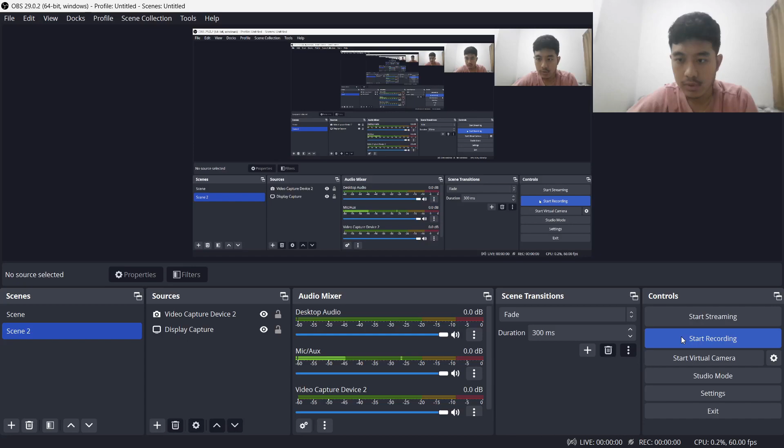Question number 2. So this video will be a series video. There will be 5 videos in total because there are 5 questions. So in this video, I will discuss and explain question number 2.

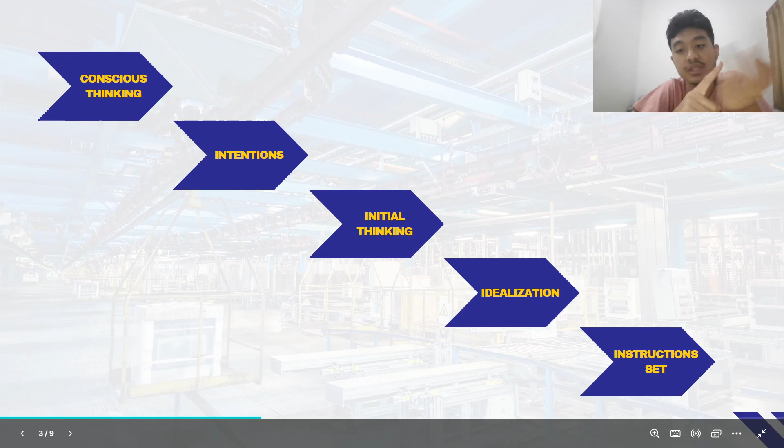Okay, so to solve the problem, we use the DAI5 framework. So we use conscious thinking, and we also use DAI5: intentions, initial thinking, idealizations, and also instruction set. So we will use this framework to solve our problems. So, intentions. So, what is the challenge first?

This challenge is: spray heads in an agricultural spraying system are to be supplied with water through 500 feet of drawn aluminum tubing from an engine-driven pump. In its most efficient operating range, the pump's output is 1500 GPM at a discharge pressure not exceeding 65 psi. For satisfactory operation, the sprinklers must operate at 30 psi or higher pressure. Minor losses and elevation changes may be neglected.

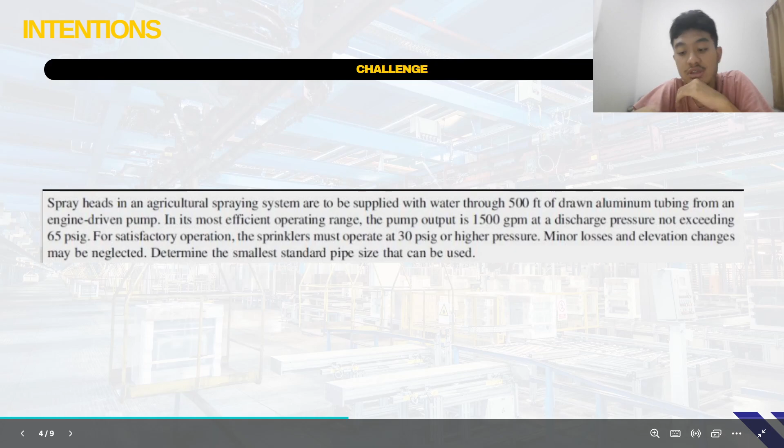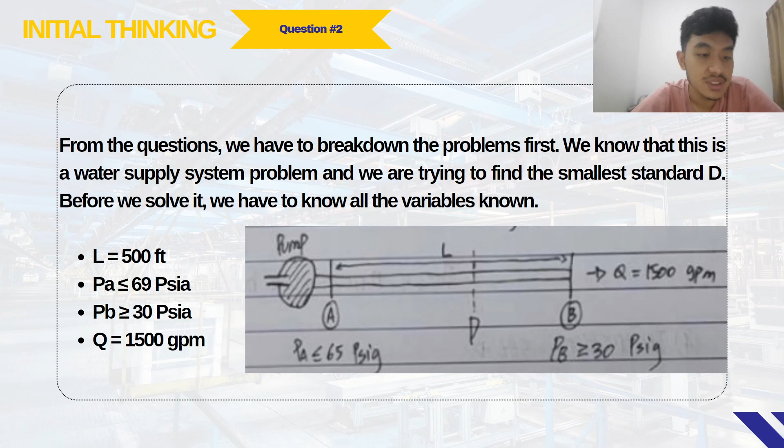We know that the length is 500 feet. The pressure A is to be less than or equal to 65, and the pressure B is greater than or equal to 30. And also the Q is 1500 GPM. So we have a few idealizations. This question is not as complicated as question number 1. It's quite a simple question. So we use a pressure equation, it's a simple pressure equation.

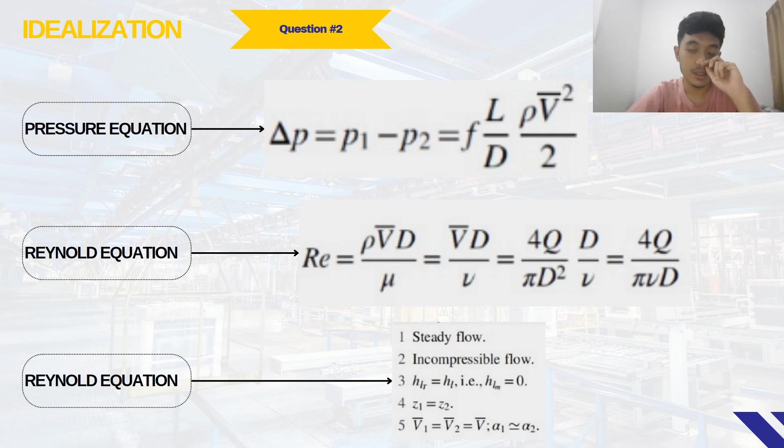So delta pressure is equal to pressure 1 minus pressure 2, is equal to f L divided by D, times rho times velocity squared divided by 2. Also, there's a Reynolds equation. We also used the Reynolds equation in question number 1, so the formula is quite the same.

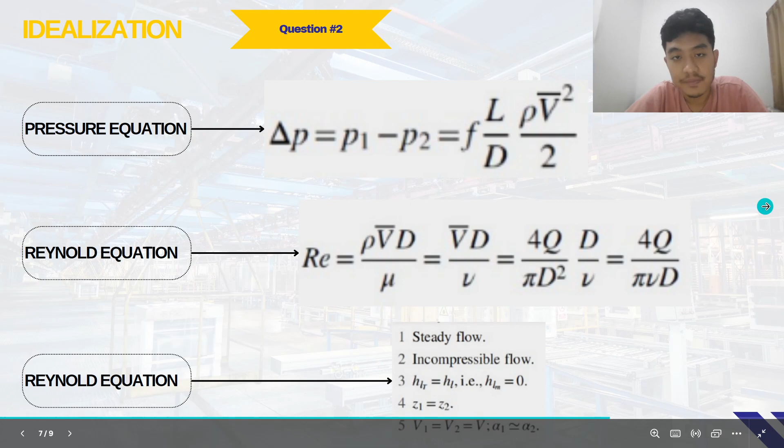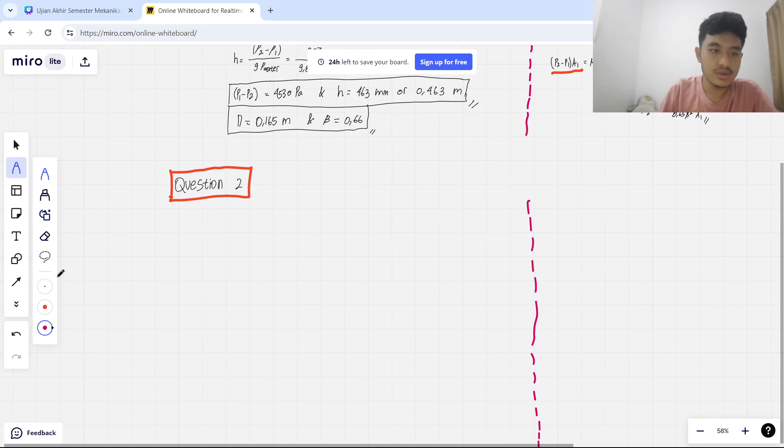And then we are set. So we will go to the instructions. I will demonstrate it on the board. Okay, so this is question number 2. I already wrote the template. Just in case. Okay, so I will do question number two.

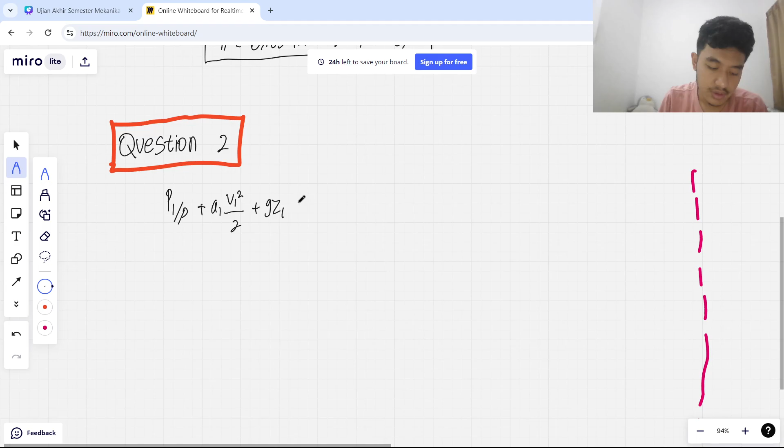So the first thing we do is use our governing equation, the basic Bernoulli equation. So it's this equation: pressure 1 divided by rho plus ... So it's very much the same as the question before, because we're talking about almost the same thing here. So I think it's quite the same.

As you know from the assumptions, we can eliminate this because it's the same, right? Assumption number five. And we can eliminate this and this because of assumption number four. So we can simplify. So it's HLT equal to pressure 1 minus pressure 2 divided by rho. So from here we know that HL plus HLM is equal to F.

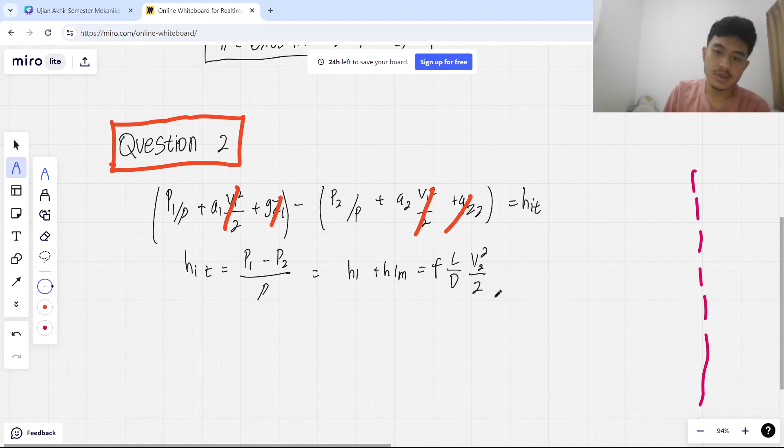Okay, so this is important. We can go to the next equation. So here we will use the pressure equation. So yeah, you can just... L per D, rho per 2. So we can substitute the V square. So V square is equal to this, 4Q over pi D squared. Yep.

So I think it's quite like that. So the Reynolds number, we will not use it first. So we will go to the Q equation. So Q is equal to 1500 gallons. So we will change this to feet cubic per second. So we have to times it by 1 per 60 and then times it by 1 per 7.48. Okay, so this is about 3.4 feet cubic per second.

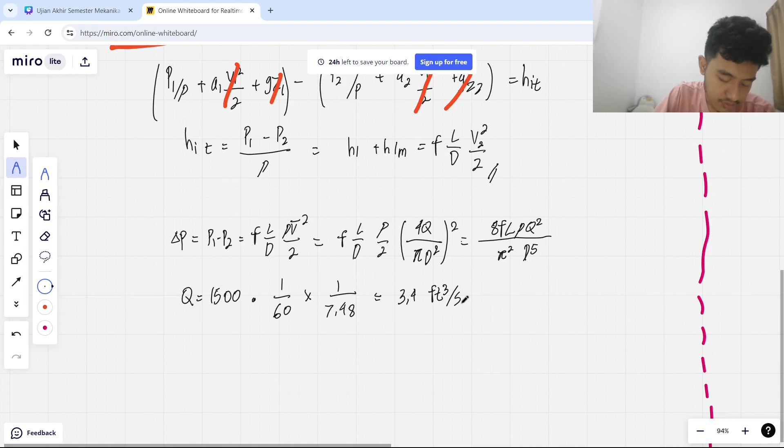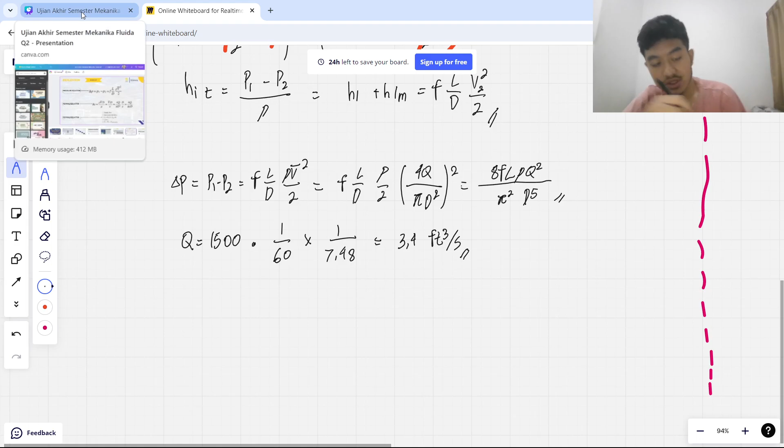Okay, so from there we can know the Reynolds number now. We can equate for the Reynolds number. So basically, I have already written my equations down here on paper, so I will not explain how to count this. So just use a calculator for an easier approach. So that's just an FYI.

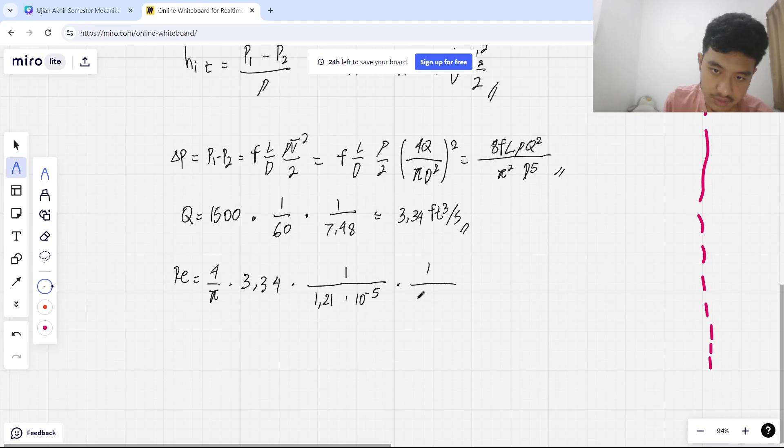Okay, so we can now go to the RE, the Reynolds number. So the Reynolds number is times 3.34. Sorry, so this is 3.34. My bad. Okay, so times 3.34 times 1. So because we do it in feet, we have to use inches. So basically we use the USA, American type of units. But the Reynolds number doesn't have any unit, so it's fine. So it's 1.06 times 10 to the power.

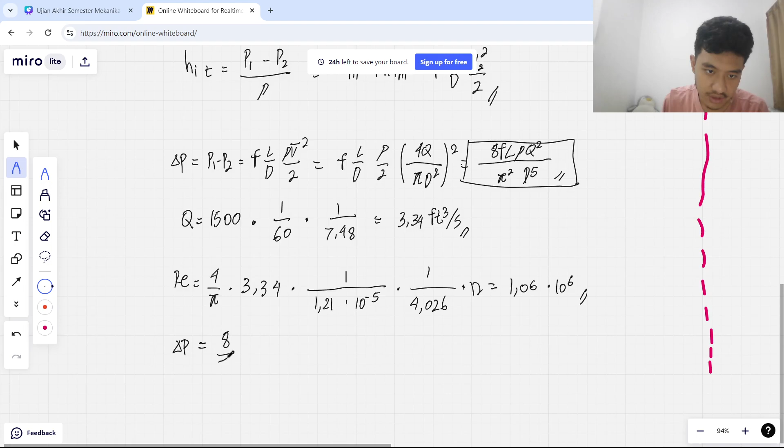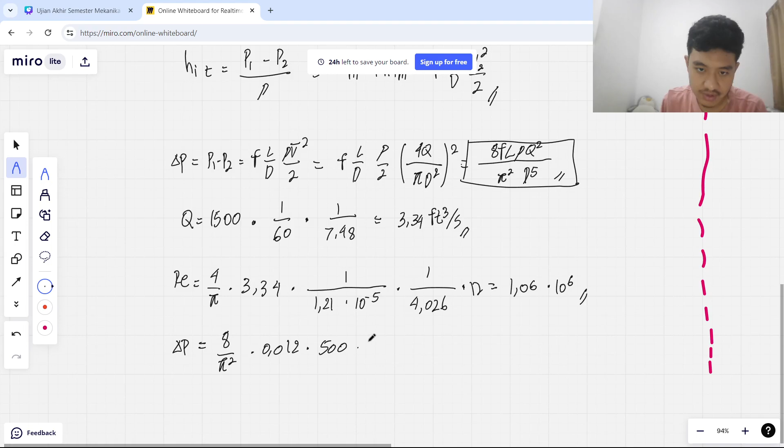And then after we find this one, we can go back to delta p and use this equation, solve this equation right there. So I will just do the counting. 8 times 0.012 times 500 feet times 1.94, and then don't forget the 3.34 squared, and then it will be divided by 1.4365, this one, and also,

okay, so from that equation, we know that the answer is about 172 pounds per square inch, which is definitely more than delta P max. So this is important information, so we can just box it so we will not forget. Okay, I will go to this part of the page. So we can count the Reynolds number again, but we use different numbers.

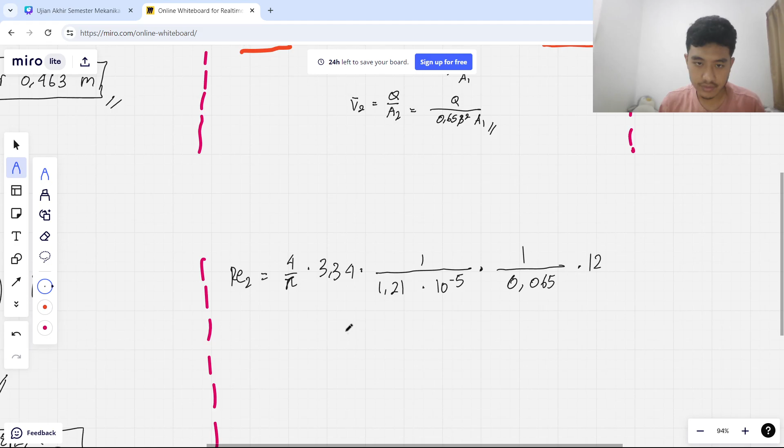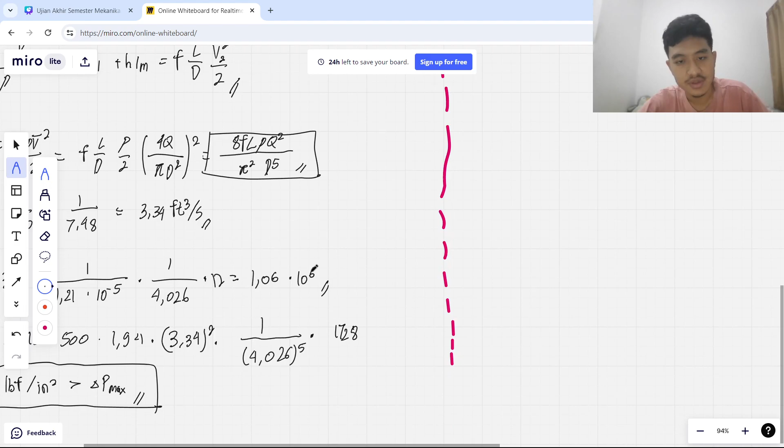So I will put it: 4 per pi times 3.34 times 1.21 times 0. So it's about 6.95 times. So it's less than the first Reynolds number because it's power 6, and this is power 5. So it's 0.695. Okay, so it's about like that.

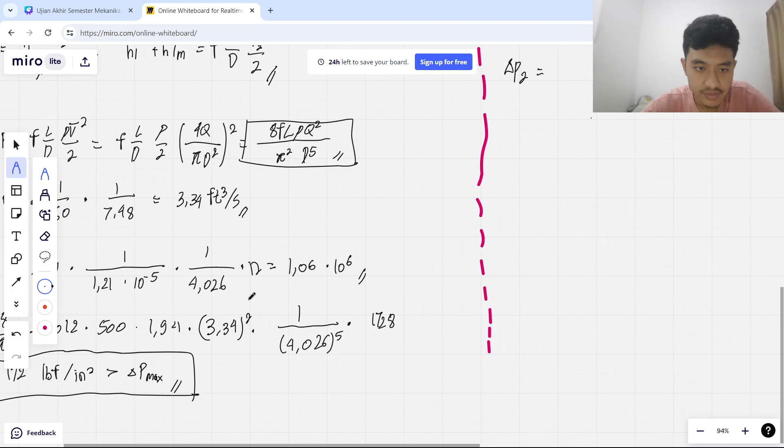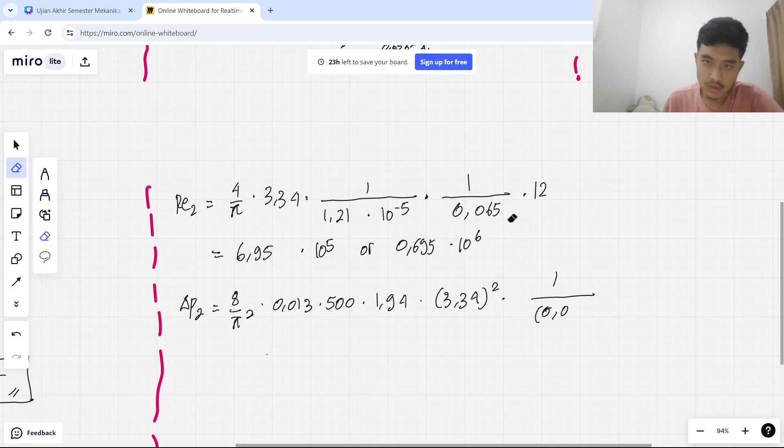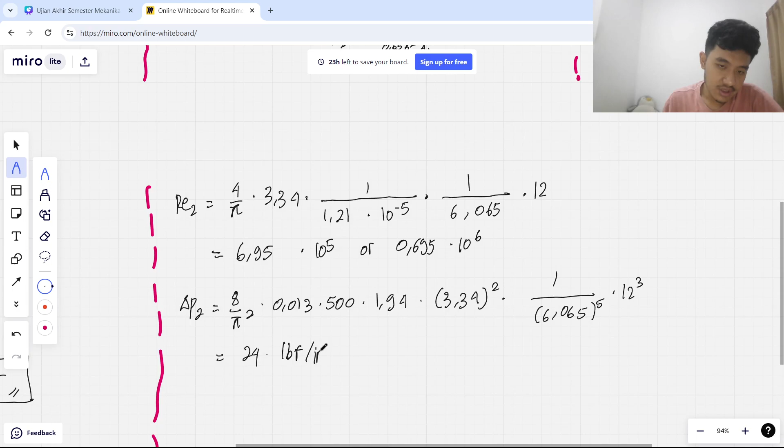And then from here we can know the tubing, so this delta pressure 2, it's the same. We can just use the same formula again, but differentiate this part, like that. Okay, so I'll just do the equations. So the answer is about 24 lbf per square inch, which is less than delta P max. Okay.

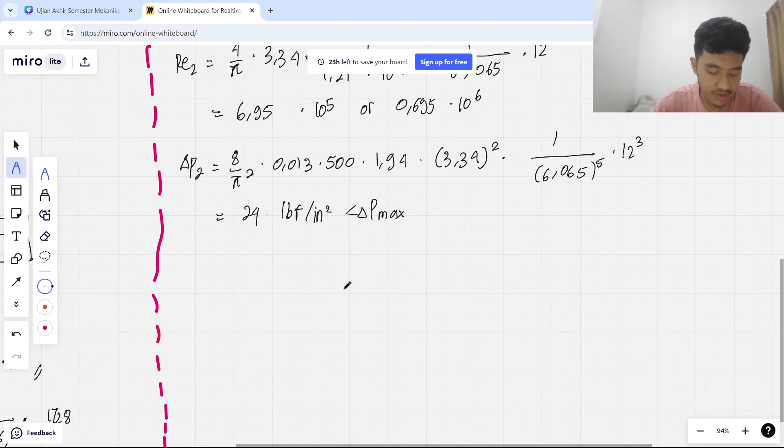So from there we can count the final Reynolds number. So this is Re 3 is equal to 4. So it's like this, times 500 times 1.94 times 3.34. So in this part we are just checking what the diameter is, the limits. So we can know the diameter.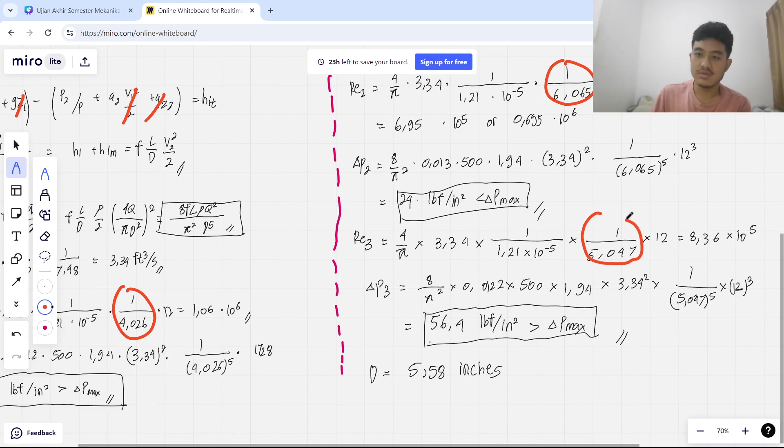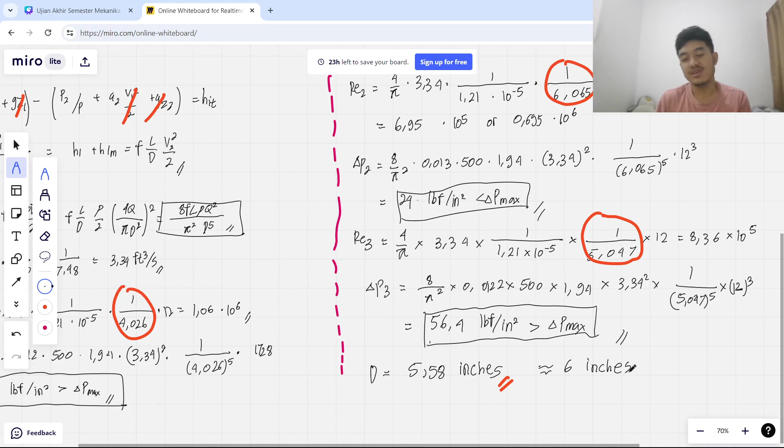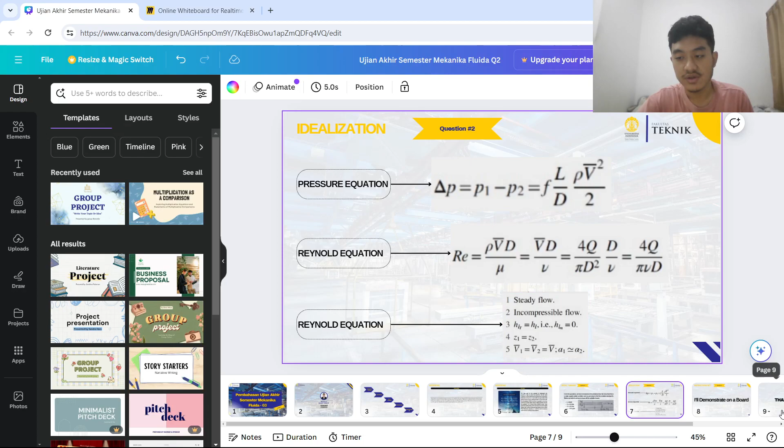So this and this. So basically we can just change it and then find the nearest number. So the total is about these numbers, but we can just round it. So it's about 6 inches, because in real life there is no such pipe that is 5.58 inches. So I think it's about 6 inches. So I think that's about it on question number 2. Alhamdulillah, we can solve it. I think that's all for this video for question number 2.